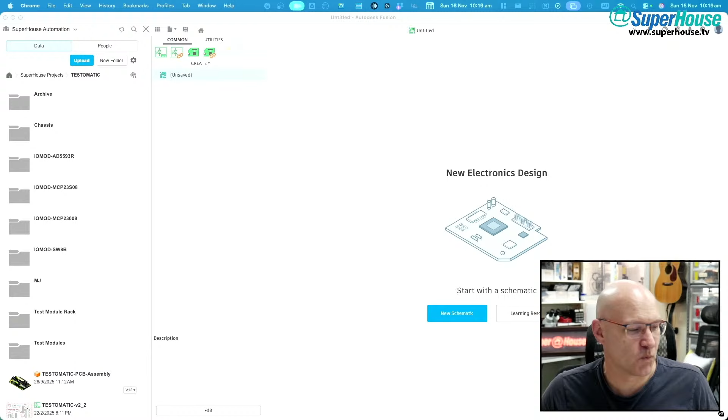Now, I have a problem. Okay, some of you will say, a problem? Just one? Only one? Okay, I have many problems.

This particular problem that I want to solve today is in relation to this - the Testomatic. How am I going to demonstrate this? All right, this is a test module.

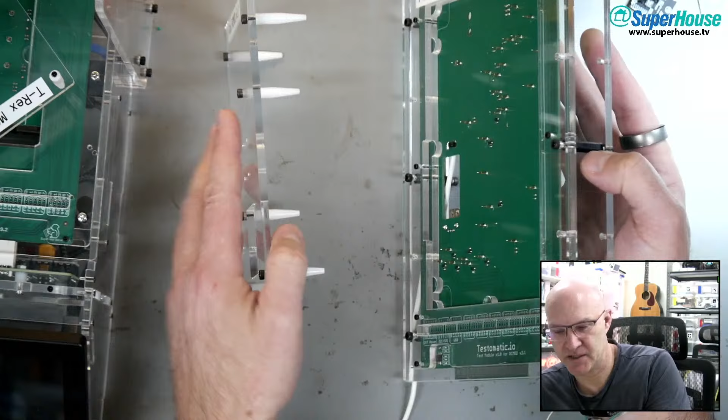This is the pressure plate. Now, this particular test module is the oversized one that goes into the Testomatic chassis. There is a pressure plate that pushes down on the top of the PCB so that it will engage with all of the little pogo pins in here. The PCB goes there, the pressure plate goes on top, and it's got these plastic pins that push down onto the top of the surface of the circuit board and engage it.

So if I rotate it this way, you are looking at the whole thing side on. It's lying on the side, but that's just because the camera is up in the sky looking straight down on me. So the pressure plate needs to be engaged like this - it pushes down on the PCB.

Now, what I need to do is - the actual test modules are quick change. It's got the edge connector on it, so I can slide these out, drop a new test module in and slide it in. That part is pretty well sorted and seems to work well. What I need is a way of attaching the pressure plate to the overhead gantry and the clamp, and being able to change them easily.

So I have an idea for how I'm going to do this, and it involves magnets. Like all good things, magnets are involved.

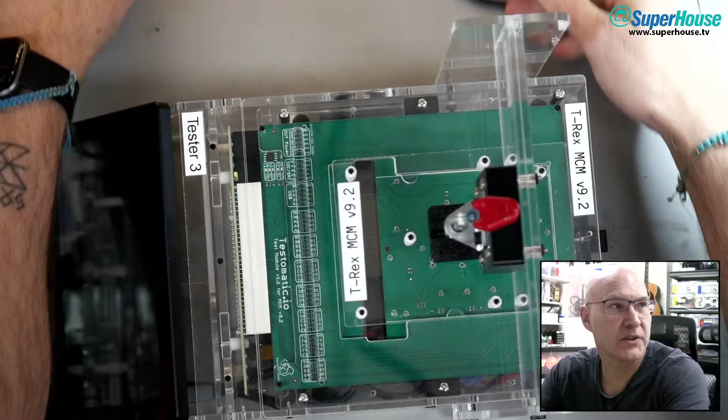This is, oops, got a cable getting in the way there. I'm going to try to tip this sideways without everything falling apart, which is going to be a bit of a challenge. All right, so this is the Testomatic chassis. There's the test module in it. There is the overhead gantry with the clamp that comes down, and that's what pushes down on the pressure plate to engage it with the PCB.

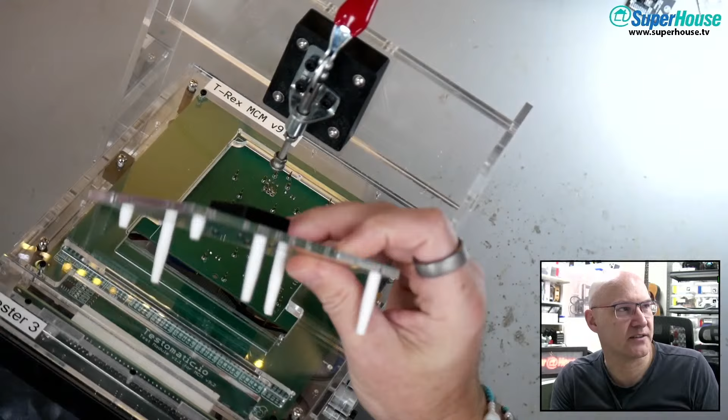So this pressure plate matches this test module. And you can see what I did was I 3D printed this little plastic block. I'll show you this in Fusion in a second, the actual design for it. It's kind of hard to see because it's all black - it'd be much easier to see if I'd printed it in a brighter color. It's got a slot in the end, like a T-shaped slot.

So what happens is this can slide onto the bolt head. If I slide that on there, that's now supported, and now it can be engaged and disengaged, and I can slide it off the bolt head. Now that is kind of okay.

This was like my first very quick attempt - this is going to be rubbish, but I just need something as a solution. So you're looking straight down on it now. It's got the T-shaped slot - you just slide it over the bolt head, and that's how it goes.

Now it does work, except that it's loose. So once it goes on, it can just fall off, and there's not a huge gap in there. If you look at the space between the pressure plate and the pogo pin area, it's like 10 or 12 millimeters gap. So you can slide a PCB in, but it's kind of awkward - the pins get in the way, the whole pressure plate gets in the way, it gets knocked off, it gets rotated.

Rotating this bolt adjusts the vertical position, so that changes how much pressure is applied. So I need to make sure that the bolt doesn't get rotated, and I also need to stop this from rotating. You can see that it just spins on the bolt head at the moment. I want it to be fixed so that it is aligned along here.

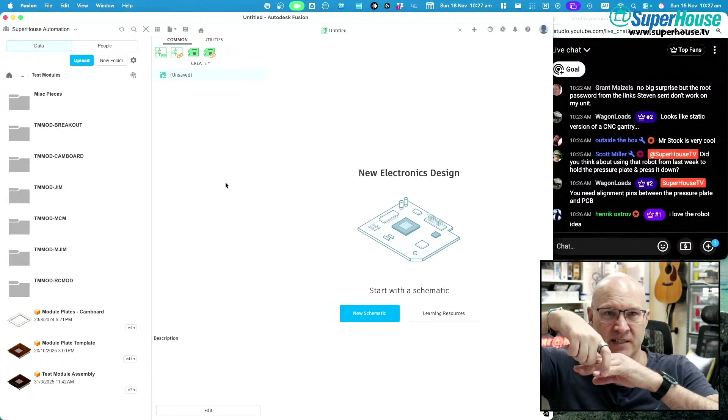Yeah, okay, now this is something for you all to think about. If I have a robot arm that I want to pick up a PCB, what should the actuator look like? It's actually a surprisingly difficult problem because the robot SO101s come with a claw gripper, which is fine if you want to pick up a soft ball like a tennis ball, the ideal size for that. But picking up a circuit board with parts on it is actually kind of hard because if it's sitting flat on the bench, the board itself is quite thin. So if you're going to grip the edges, you have to get the gripper oriented very accurately and it can slip off the edges of the PCB. But you can't grab the top of the board because there are parts on it, there might be capacitors sticking up and other random bits and pieces. So the idea of something like a vacuum pickup is also very tricky.

So, question for you: figure out a design. Ostrov said, can you make a longer piece for the clamp so it won't rotate with a pin? A longer piece for the clamp so it won't rotate with a pin. Yeah, maybe. Yeah, there could be multiple pins.

So the way this thing works, this is a mechanism off a test jig, and you can see it's got two vertical rails, vertical rods with little linear bearings in them. So the idea is that this plate moves vertically and it can't rotate, it can't twist that way, it can't twist that way. It's held by these two things here, and then the clamp just pushes it up and down. So that is a way of constraining the mechanism. But that's not changeable because you've got to disassemble this to get the plate off. So then what you'd need is a way of attaching the pressure plate to this with a quick release mechanism. So you're still stuck with the problem of how do you design that clamping mechanism.

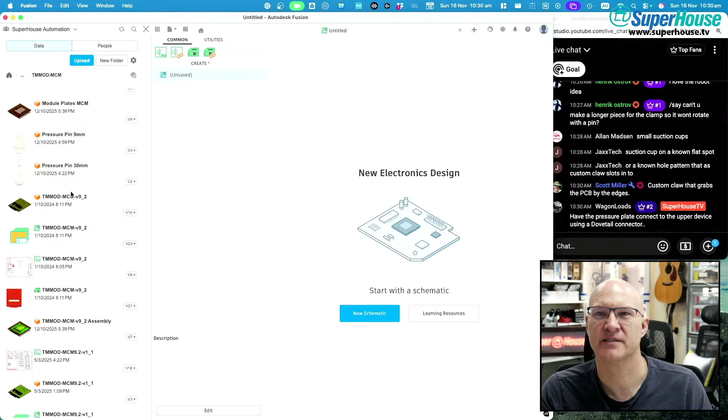Okay, where are we? TMMOD. Where did I even... Oh, miscellaneous pieces? Is this where it is? No. I'm trying to find... Oh, maybe I did it inside one of these. What I'm just looking for is... Oh, no, it might be in the template. No, not there. It's like Camboard, MCM, or maybe it's in MCM because that's what it's attached to. There's a clamp, the pressure plate, pressure pins of different sizes. No, I need to go through and do a bit of cleanup and reorganization of this. Not there.

Where is it? Oh, I don't even know what I called it. JaxxTech said, re your pressure plate, look at how sewing machine feet are attached. WagonLoads says, have a pressure plate connector connect to the upper device using a dovetail connector.

It won't be an RC mod, I'm pretty sure. No. Where is it? Oh, maybe under chassis? Could I have put it in here, even though it would not be the appropriate place for it? Yes, I did put it in here. Pressure plate clip.

This is the thing that I've got. Henrik said usually they use like flip up lids with interchangeable plates, for example, no rotation on there. Scott says industrial robots are always designed for replaceable end actuators, then the actuator is designed for the task.

Yes, exactly. So that's what I want, is a design for an actuator that could be attached to something like the SO101 robot. Now, in this design, you can see much more clearly the black thing that is attached to the top of the pressure plate. So this thing here that you can see, that black 3D printed plastic thing, that is this.

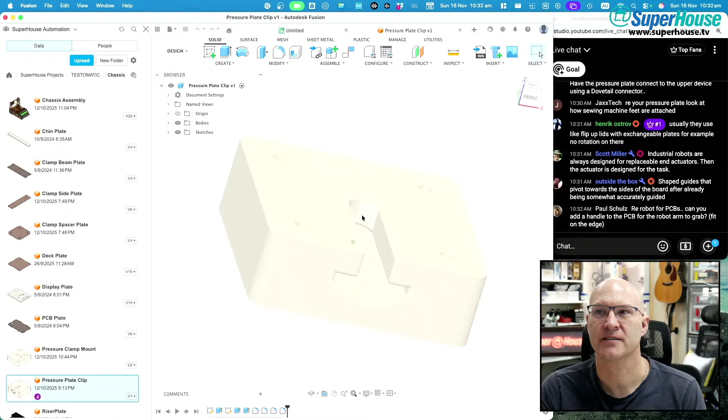So you can see that the head of the bolt slides into that T slot and then pushes down on this. And it's got these 4 screw holes, and the pressure plate is laser cut with holes in it. So there are self-tappers that go up through the pressure plate and into this block. Okay.

Now, there is another - this is going to sound totally ridiculous - there is another constraint. Actually, no, before I get into that, I'm going to... what am I going to do?

I'm going to create a new design, and where am I going to begin? Okay, I'm going to steal some geometry from this.

Edit sketch. I'm wondering if I should, yeah, stuff it. I'm just going to, or do I? My brain is kind of zigzagging, would be one way to put it. It's jigging and jagging because I'm thinking through all the different ways of actually starting.

Henrik says, can't you just use T-shaped head bolts? Just use T-head shaped bolts? Yeah, but how? In what way? You mean like just the way I'm already doing it?

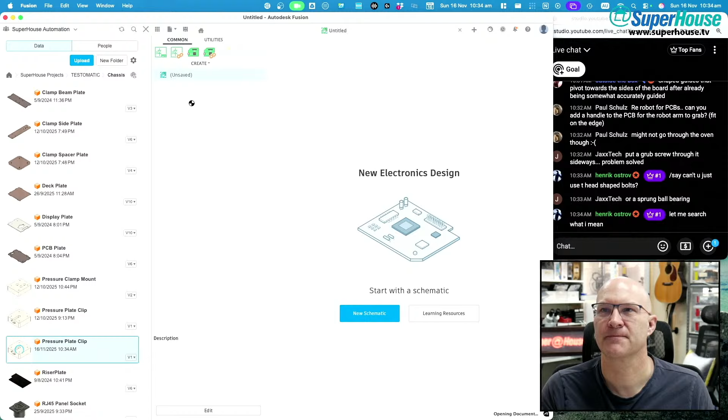Okay, so what I want to do, okay, I'm going to get rid of that. I'm going to close that pressure plate clip. I'm going to be really lazy, and I'm just going to copy this. And hang on, did that go into the, yes, it did go into the right place. Okay, I'm just going to make a copy of it. So I'm going to open this, close this, and I'm going to backtrack in time.

Pete time said, I see nobody has liked Jon's video, lol. It's because nobody likes my video. And get rid of that.

Okay, so what we are left with now is just a block, because I've just suppressed - in fact, can I multi-select? I'm just rolling back in time. I'm just going to delete all these features. Okay, so now we have a block. This block will fit the holes on the top of the pressure plate.

Now, okay, I'm going to get back to my silly restriction in a minute. Edit feature - so at the moment the block is 10 millimeters thick. I'm going to change that to 3 millimeters because what I'm going to do is put magnets in it.

Now, if I edit this sketch, I'm going to make some construction lines through here on the axes, because I'm going to... Henrik Ostrov said, I've sent you a link for the part I was thinking of. Yep, I saw a message, but I'm going to keep working on this.

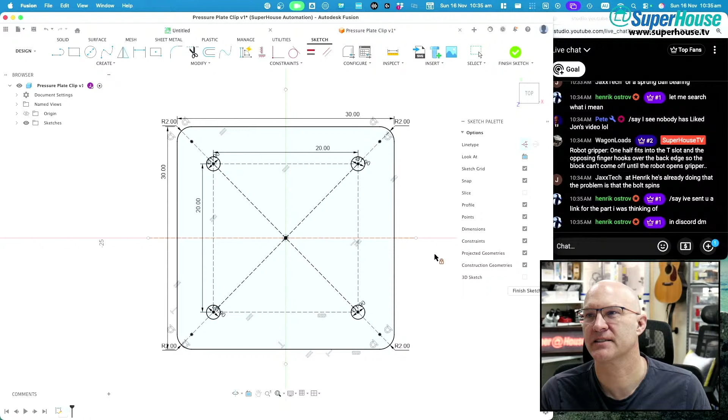Constraints, fix. I'm going to fix that and fix that. Then, what am I going to do? Modify parameters, and I'm going to... do I have any parameters? I do not.

Magnet diameter, and I'm going to make that 3 millimeters, and make some circles on, and I'm going to do magnet diameter, circle, magnet diameter, yes.

So this may be excessive, but I can always just not populate holes if that works out to be the way it goes, the way the cookie crumbles.

Alright, so I'm going to finish that and modify that and get rid of... Outside the box said, Immi and I can only hear you, as her tablet just failed and YT is functionally not a thing on a phone. Oh well.

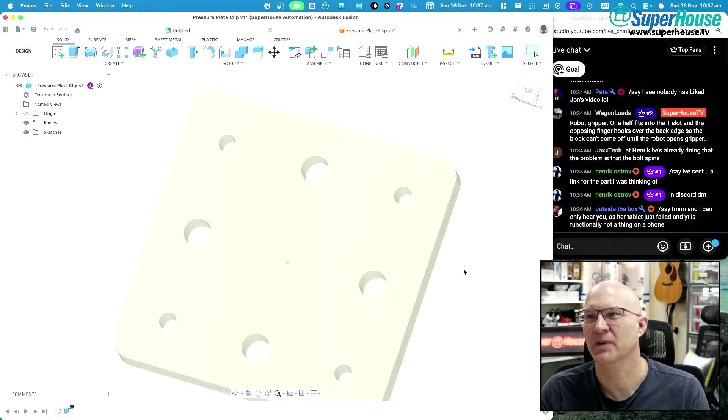You'll just have to use your imagination. Use the magic.

I'm just going to measure the diameter of the bolt head, which I could have got out of the other model, but anyway. It's just under 9 millimeters, so let's make a 10 millimeter hole in the center here.

Now I am visualizing here the end result of what I'm trying to get to.

Tabraze Malik just got back onto stream. Why not just change the bolt to one with a square head or 3D print it? I don't think that's going to solve the problem, because the bolt could still turn inside. Well, then how do you attach the bolt?

I want something where I can just snap these pressure plates on and off and have them go into the same orientation every time. So I want to do that, and then edit this and get rid of that. Anyway, yes, I have this visualization in my head of what it is that I'm doing here.

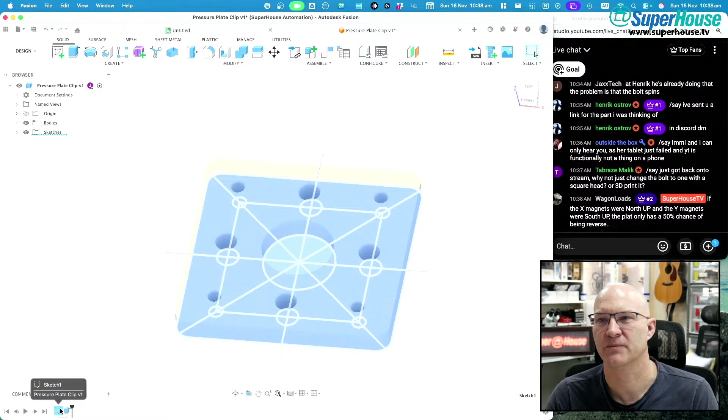Sorry, I got a message about... oops, I want to select all of these. No.

This could... do I want to angle this? I think I maybe do.

Okay, so that's 3 millimeters. I'm going to bring it in 1 millimeter. I'm just kind of talking to myself now.

All right, I want to chamfer this, but I want it to be... chamfer, 8 edges, equal distance. No, I want 2 distances. I want this one to be 1 millimeter, and I want the other one to be 3 millimeters because that's the thickness. Okay, so now we have a plate that

has the holes for it to be screwed onto. You're actually talking to all your imaginary friends. Yeah, you're right, Scott, I'm talking to my imaginary friends.

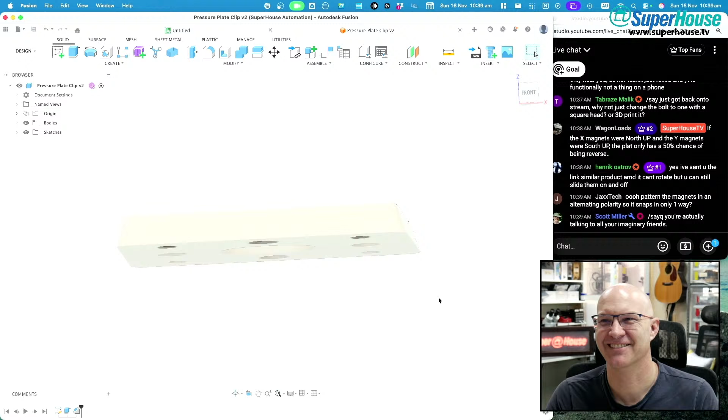So the plan with this is that this is to replace the black 3D printed thing that is currently on the top of that pressure plate. So what I've done is I've reduced its thickness to 3 millimeters because I'm going to use these little magnets, I've got these little things that are 3...

Oh, magnet thickness, I just screwed up. These magnets, they're little, you know, the little round disky type ones. I've got a bunch of them here. They are 3 millimeters thick, but they are not 3 millimeters diameter, they are 6 millimeters diameter.

So it is a good thing that I parameterized that. Let's make that 6 millimeters diameter. That would have been annoying. Okay, so now we've got holes for the magnets to go into. The whole plate is 3 millimeters thick, which means it's the same thickness as the magnet.

Said, I meant the bolts are meant for aluminium extrusions. Some of them can turn, but others actually don't. Ah, okay, they meant, yeah.

But the problem is, how do you attach it? I need a mechanism, the bolt is not the problem. I need a mechanism for attaching it to the pressure plate, because the pressure plate is just a piece of acrylic, it's a flat piece of plastic.

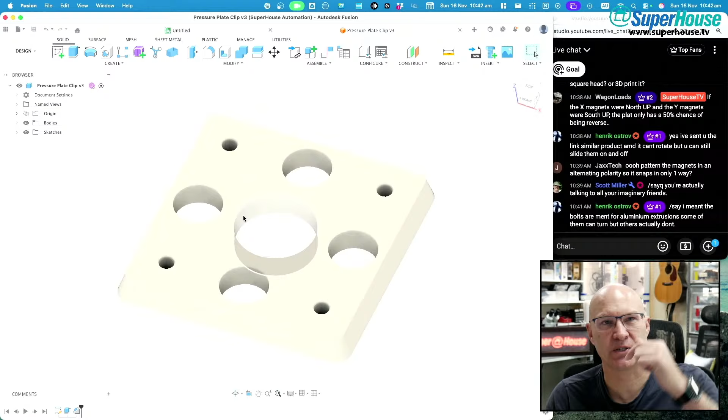Now, the reason that there is a big hole in the middle is that is possibly unnecessary, I don't even know yet. That's going to be for the end of the bolt head, potentially, which might protrude down from the clamping plate, the clamping portion that is going to intersect with this.

So here is what I'm going to do next. Now, what have I got? It is 30 millimeters across, 20 millimeter centers on those. And that's going to, oh no, that'll work, that'll work.

What I'm thinking of doing here is making the negative version of this piece that it will fit into.

Said, it can slide like the first solution you showed, just it won't rotate on the bolt head, something like that. Yeah, maybe. Okay, now I want to make...

I don't want to do that. I want to make a new design and sketch on there. Oops, wrong, no, I don't want to do that. I want to delete that sketch. No, finish sketch, delete, delete, delete.

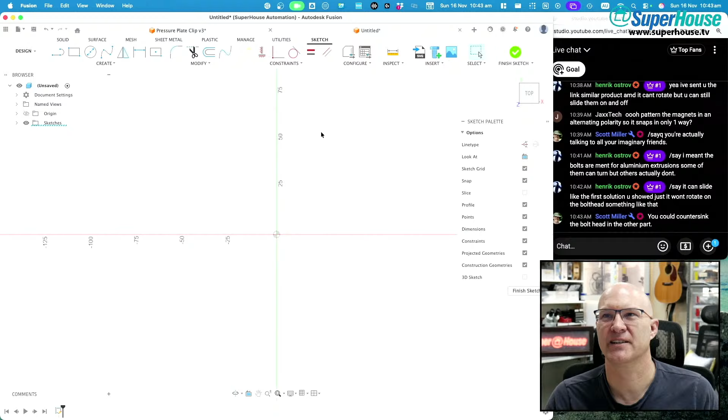I put the sketch on the wrong face. I want to put it on there. Okay, so we're looking down at it from the top. How am I going to do this?

So I want to go 30 millimeters, then angle it in, but I want 30 plus, okay, here we go. 30.

I have a cunning plan. This plan is so cunning, my lord. And then how much? 5 millimeters out, so I'll go 40 and 40.

And then, what did I have as the fillets on the inner corners? I think it was 2 millimeter fillets. So do a 2 on each of these. I don't know why the fillet tool deselects after setting - there's probably some little workflow thing in Fusion that I could improve.

Just because I like the idea of making the edges slightly rounded, I'm also going to put 2 millimeter fillets on the outside. And then we are going to turn this into an object. So I want to go up, then push that in. Yeah, okay, here we go.

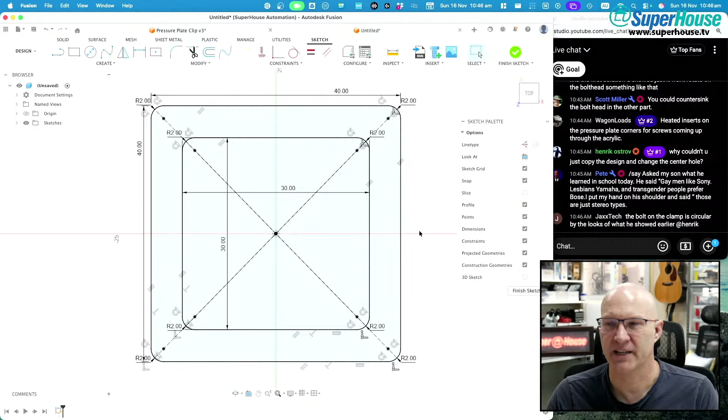Now coming back to here, what I probably should have done is once again duplicated this. In fact, it's not too late - I could just duplicate this, then the extrude can, yeah.

Yeah, it's not too late, I'm going to ditch this. Okay, I'm going to delete that and don't save - so I have now just undone all of my work. Back to here, duplicate this one.

And yes, copy it to here.

What about making the mounting block in two halves so they're keyed to each other, dovetails or alignment grooves, or upper half frames around the lower half? WagonLoads just described exactly what I'm doing - what's in my head, which has not yet come out in reality. So you are going to see all of those things.

JaxxTech said, why not use a hex head and have flat sides that hold the plate in alignment, or does the bolt itself spin? Oh, the bolt itself spins unless there's a locking nut against the other end of it, which is used to set the vertical position, so there is a complication. I can't use a hex containment of the bolt head because I need to be able to rotate the bolt to adjust the vertical position. So we will get to that.

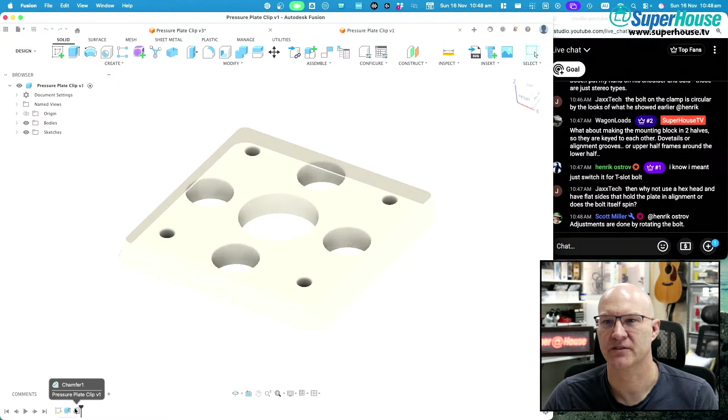Okay, this - alright, I'm going to suppress that. Stuff it, I'm just going to delete it. Yes, delete it, and delete the other thing. Okay, so now, edit sketch.

So what I'm going to do now on this one is change this diameter to 4.2 because I want to put an M4 bolt through there. And I'm going to get rid of these corner holes, and add another rectangle out here and take it out to, what was that, 30? So that's right, I was doing 40 and 40, wasn't I?

And then I'm going to fillet those corners - that one and that one. And now I will have something that I can use to make effectively a negative of the other part, like almost a dovetail sort of thing. Okay, so now finish - do I want to finish? Yes, okay, show me the sketch.

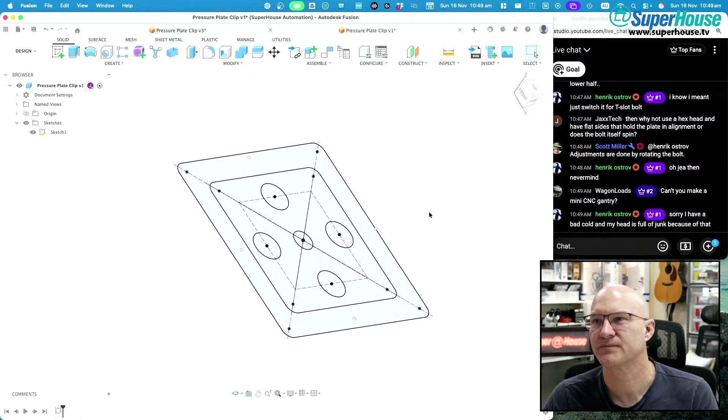Okay, so now I'm going to extrude everything, and then undo. Scott Miller said countersink the bolt head - yes, that is my plan.

So then I'm going to press pull, how much? Let's make it - no, I've got to envelop the 3, then the 3, which is 6, plus 4, yeah, 10. 10 millimeters should do it. Okay, and then bring the sketch back. And now, this is when the magic happens. I'm going to include all of these there.

Repeat press pull, and I'm going to go 3 as a cut. Then turn that sketch back off.

Grab all of these edges.

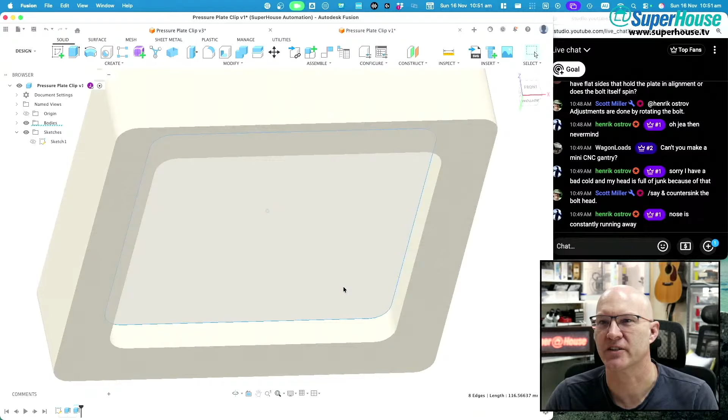Also I should mention I may be taking myself to hospital after this stream to get a tetanus injection. What's going on out there? There's someone outside doing something, and I don't know what.

Okay, chamfer, 2 distance. I want that one to be 3 millimeters in that dimension, and I want that one to be 1 millimeter in that dimension. Okay, which matches, yeah.

If your eyes are going strange right now, and it looks like some optical illusion thing, it's possibly because I have the camera set in orthographic mode. If I switch to perspective mode, it'll start to look more like the actual physical object, but it's not so useful when you're doing the stuff. Okay, so now I'm going to turn that sketch back on.

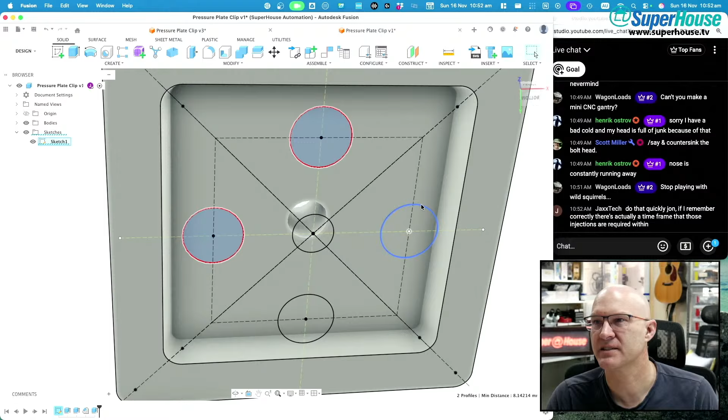I'm going to press pull to that face, and then I'm going to grab these and press pull 6 millimeters, because that is the 3 millimeter gap plus the hole. And now we have a block that has holes for magnets.

It has a hole for the bolt head to go into, and it will fit down on top of this. So this part will be on the pressure plate, and this part will come down descending on top of it, or the other one will come up underneath it rather, and the magnets will all snap together. So the bolt will come through here, the bolt head will be on this side, and the head will fit into this clearance hole. That's my plan anyway.

But what I think I'll do is rebate the... Tabraze Malik said, 'Why, what happened? Did you step on a rusty nail?' Oh yeah, that's right, I did. I did exactly that.

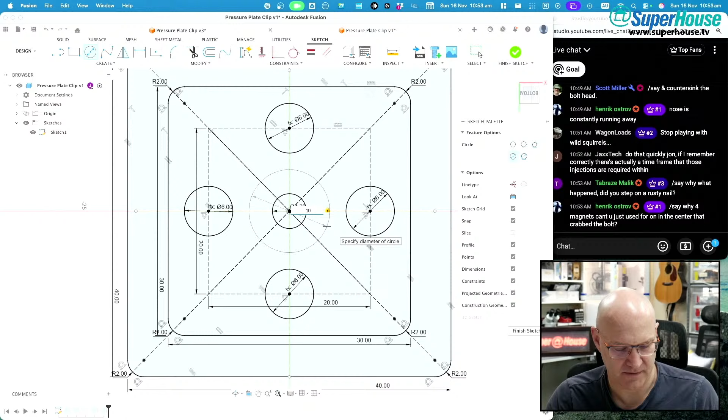Let's make this Henrik Ostrov 10. He said, 'Why 4 magnets, can't you just use one in the center that grabs the bolt?' Because I want to stop it rotating. Well, I could just use one in the center to grab the bolt. Yeah, I don't know, that is an interesting idea to brace. That would possibly optimize the design a little.

So I'm going to press this to 6, which will give it 3 millimeters of rebate. Okay, so I'm going to save that and maybe do a little bit of...

Do I? Don't I? Yeah. Just a tiny little smidge of filleting here, just because I think it helps. No, I'm going to make that bigger. Let's make that 0.4, okay, so it can be printed this way.

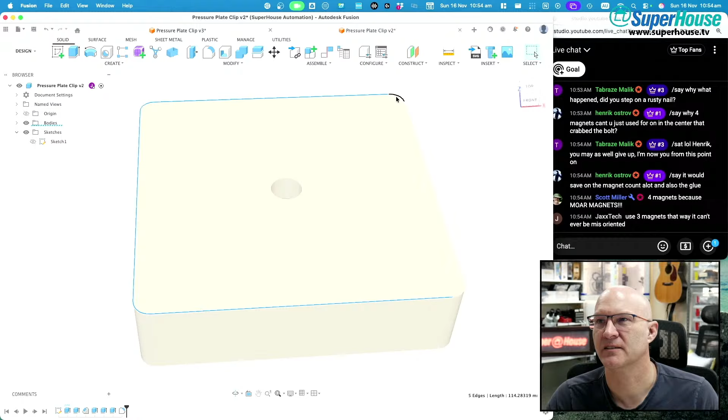Now, do I want to do anything on those edges? Yeah, I think I might just slightly bevel these edges. Henrik Ostrov said, 'It would save on the magnet count a lot, and also the glue.' Yeah, that's true, it would. I'm just not sure that it would be strong enough.

Now, where am I? Yeah, the magnets may be overkill. I don't know, this is all going to be an experiment. This is going to be the first thing.

What am I doing? Chamfering, that's right. I'm chamfering by 0.5. No, I want the chamfer bigger. Let's go to 1 - that still doesn't look like very much. Let's go for 2. Oh, I see, it's a... it was a double. Yeah, that'll do. Okay, 2mm chamfer on there.

Can you test right now how strongly the magnet sticks on the bolt? Yes, yes, I could.

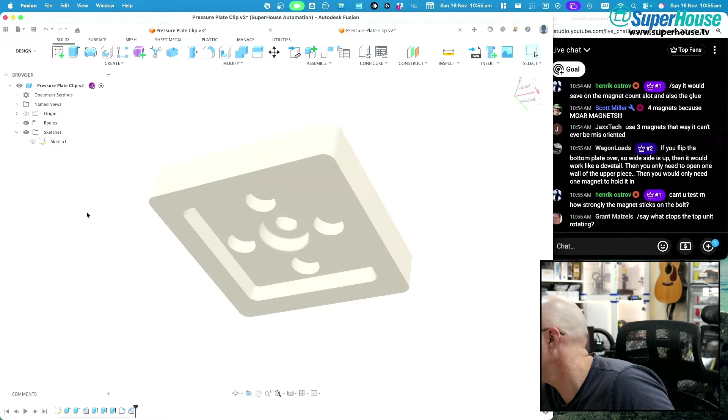Grab a magnet, grab out the bolt. Just got to unscrew it from the thingamajigamy. Oh, this bolt is a lot longer than I thought. Oh, it doesn't stick at all. Hang on, yeah, so this is the bolt out of it. This is a magnet - it sticks to the nut that is on the bolt, but it won't stick to the bolt because the bolt is stainless steel. I hadn't thought of that.

Yeah. If it wasn't an off-white object on a white background.

Yeah, okay, so alright, so next stage is I am going to go appearance, and let's pick something that will make it easier. Oh, come on. Plastic. Polyimide? Yeah, let's do that.

Okay, so we'll make this one gold, and this one - what do we do for this? Let's make it a translucent thing, and we'll make it translucent. Oh, what about maybe transparent? Yeah, transparent acrylic red, okay, let's do that. And that way, when we... oh, maybe the other way around. Oh no, this will do.

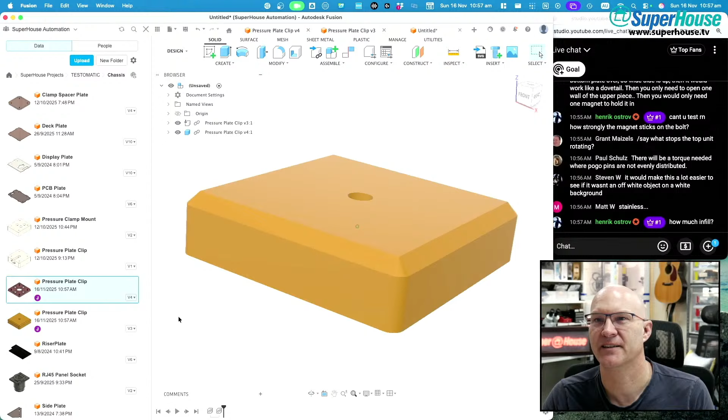Yep, that, and then save that, and then I'm going to go new design, bring this in, insert into current design, and boom, and then this one, insert into current design. Yeah, I should change it so that the translucent one is on the outside. Let's do that. We'll go appearance on this one, make this one that, and then save it.

And this one we will make... where was it? Polyimide, Kapton. Let's make it that.

And save that. Now we'll update the components in this one, and we will get the translucent red outer shell, which will be attached to the bolt. So that's going to be on the... let's see if I turn it, yeah, so this part here will be attached to the bolt. The bolt will go up through there with the head recessed inside and attached to the clamp, and then this part will be attached to the actual thingamajigamy.

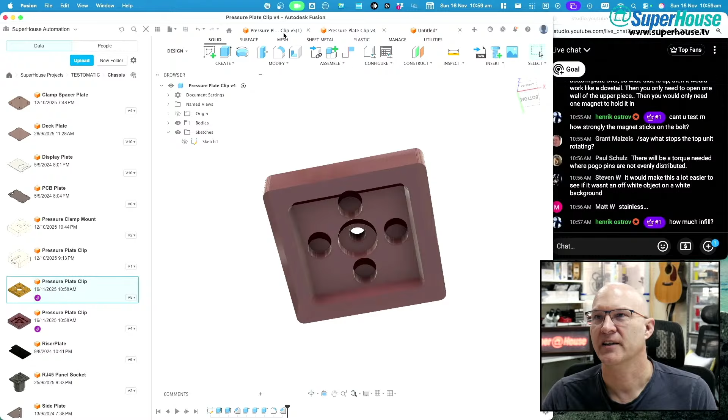Now, one of the reasons I have been puzzling over this whole design in my head for so long is that I have a very specific constraint that I want this part, which attaches to the pressure plate, to be as thin as possible. And if I'm going to use a magnet, the 3mm magnet is the...

Scott Miller said, now model the bolt from scratch, threads included. That's actually remarkably easy in Fusion.

I have done it before many times for different types of things.

No, I'm not. I was going to start designing a bolt with a hex head, but I need to get these other things off to the printer.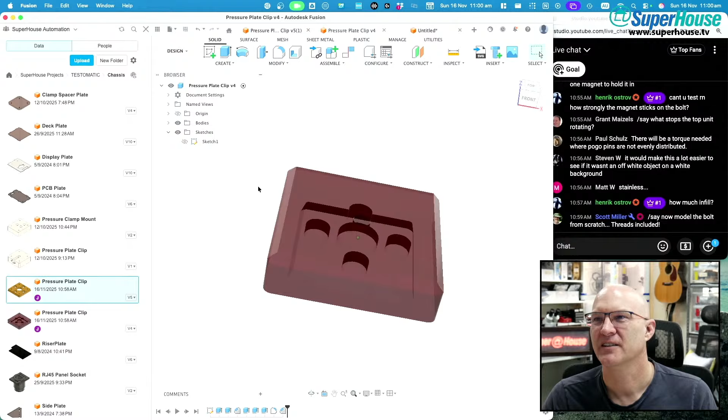So let's do this. Let's send these to the printer, and then I can go on with other things. So what am I going to do?

I want to save as mesh. That's right, I'm trying to remember what I'm doing. Okay, pressure plate test. No, I don't want to save it there. I want to save it, just moving off screen, just in case, since I'm not sure what's going to pop up.

Dropbox, 3D printing, where are we? Testomatic. Here we go. And pressure plate clip. Yes, replace.

Oh, I should give these more sensible names. This is silly. All right, pressure plate clip... pressure plate clip lower, that'll do for now. Rename: pressure plate clip lower. Pressure plate clip upper.

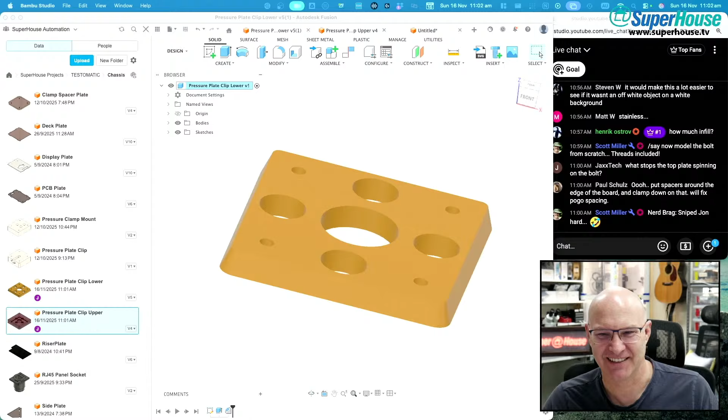Okay. Where are we? Device, wake up device, sync. Okay, sync info, grab the filaments because I'm not sure if they are up to date. Looks like it is.

Okay, let's grab, where are we? Testomatic, pressure plate clip lower, and move that aside somewhere. And then we're going to grab upper, and what I want to do is flip it.

Ostrov said, how much infill are you going to use? Oh, not much, they don't need to be super strong. So what filament should we use is the question.

I think I'm going to do them in blue because that's the blue PLA that's loaded at the moment. I could do them in two different colors, but then there'd be lots of filament changes, there'd be 3 millimeters worth of filament changes.

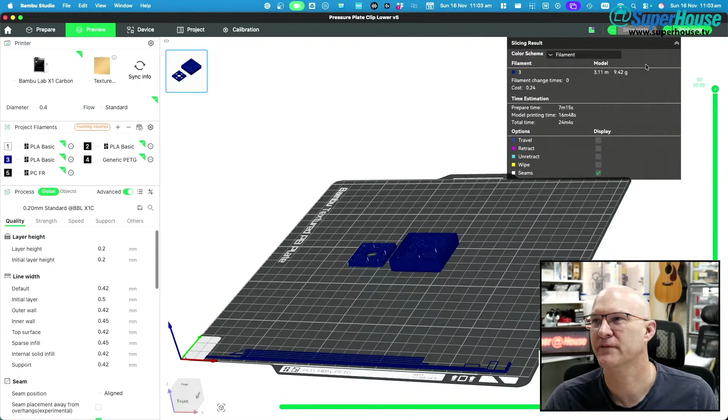What have I got? Okay, standard 0.2, don't need support. Yeah, slice, go. What's it saying? 24 minutes total time with 7 minutes prep time. So do it, printer, go.

Start giving me my things. Now, I have an embarrassing reason for needing the part on the pressure plate to be 3 millimeters thick, and that is that I need...

Yesterday I designed a rack to hold these things on, and I started... I'm just going to move that out of the way for now so we can look at other things. Now, where are we? Testomatic, test module rack. Okay, what I did was, these modules are awkward.

Like this thing here, I designed it so that it has a nice bottom on it. You can put this down on a bench, and even though it's got all the pogo pins and things underneath, see it's got these spaces, these are 20 millimeter spaces, and then there's the bottom plate, and I put rubber feet on it. So I can just put these down on a bench, and they're actually really quite convenient like that.

Then the pressure plate, if it's just like this, you can stack them on top of each other. But stacking is not particularly convenient if you end up with a stack of these on your bench. And also, I need to store the pressure plates with them ideally, so that's stored as a unit, and that's not convenient because how do you stack those?

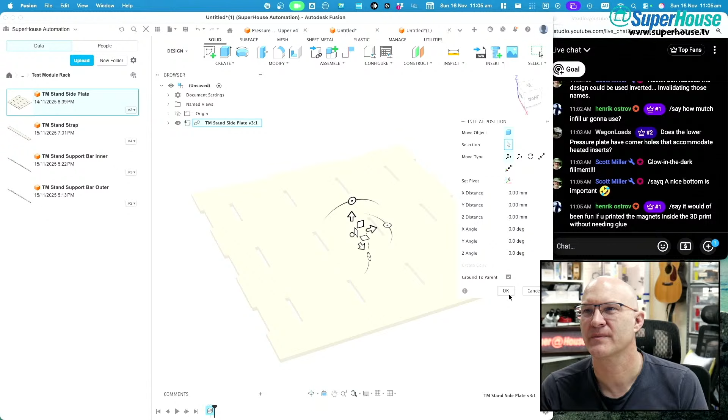Ostrov said it would have been fun if you printed the magnets inside the 3D print without needing glue. Oh yeah, get it to pause the print at that point and then insert them. Yeah, that's true.

All right, I'm just going to stand that up. So what I need to do is change the support bar outer, insert into current design. Now, which way is that? Oh, I need to rotate that. No, I need to rotate it that way because of the bolt holes. And there, take it up to there.

I need to do this out of a different material so that... is that right? Yeah, that's right. Okay, so that we can see the difference. So that goes there. Then a stand strap, insert into current design, and I'll rotate it that way.

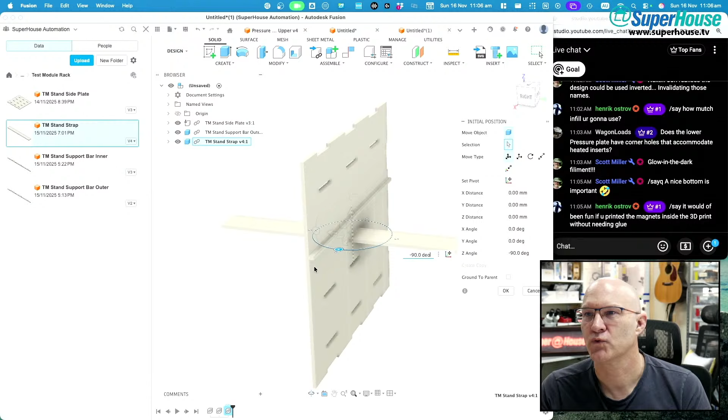Bring it down to there. Is that right? Or I may need to bring it like a 0.5 millimeter increment or something at this point. But I can do it with a joint as well. Okay, let's joint this. Let's joint this.

So you can see that there is a flat plastic thing here which has got little rebates. The reason for the rebates is to force alignment of the center point, which is not going to make a whole lot of sense to you right now. But I'm just going to joint this.

Oh, hang on. No, I've got to... stand strap. Move, move. Rotate that 90 degrees. I just want to get it sort of approximately into the ballpark of the position. And then I can joint it on... I want to joint that onto that.

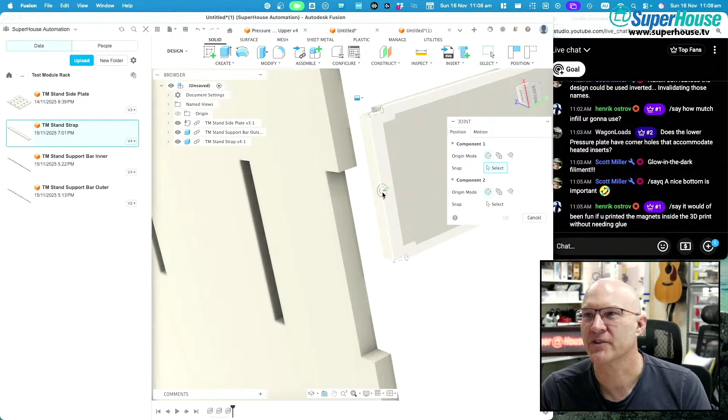Oh no, I got the wrong thing. I want to joint it onto... I picked the wrong face. I want to joint that onto that. That's what I should have done the first time. Okay.

And then I will do insert into current design and rotate that 180, move it this way. And how am I going to do this alignment? I won't do it with a joint. I'm just going to set it to 190, 185. I think it's got to be 187.5.

187.5? No. 180. It might be 181.2, 188.25. Or is it 0.5? Yeah, that'll do. Anyway, this is just a representation. All I'm trying to do here is give you an idea of what it is that I've done.

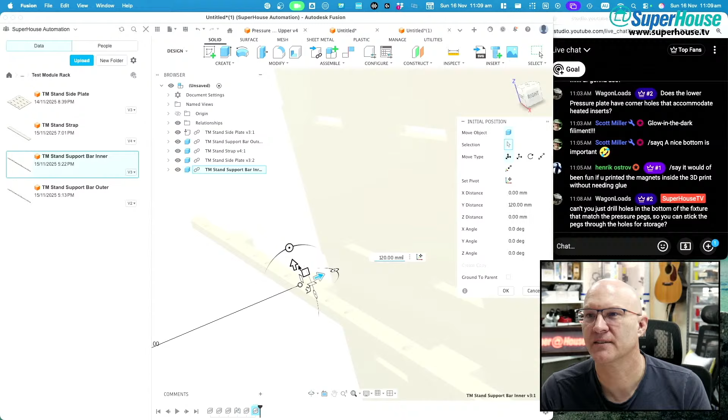And then there is an inner, insert into current design, and yeah, take that up, take that across. Oop, it's a little bit high. And bring it down to align it there. Is it aligned? Approximately. And now I'm going to leave it at that position, not fully engaged with the slots.

Because what I did was I've got these vertical plates. All right, backing up. The whole reason for this is if I'm going to see if I can pull up Reolink so I can show you a camera view of the clean room.

Login succeeded. Yeah, so show me some cameras. Show me some cameras. Oh, okay. Hang on, I will be back in a second. I've got to enable some stuff. Things have been moving around in here.

Because I want to give you a view inside the cleanish room so that you can see the reason that I came up with this semi-arbitrary 3mm constraint.

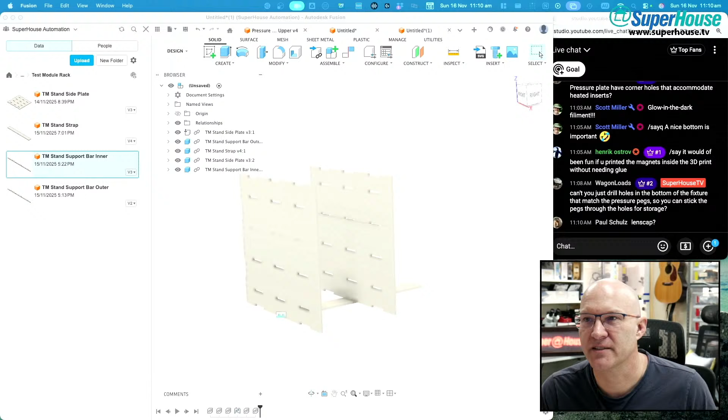All right, while that is happening, I am going to open this and change this to... I want this one to be, yeah, let's do it, that'll do. Translucent acrylic, red, doesn't matter what color. Because the point of this is just to be able to see what's going on here.

So what I did was design the... yeah, I don't have any cameras. No camera, no camera, no camera. My cameras aren't working. My cameras aren't working. Come back, cameras.

Reolink. Aha, camera, camera. Yes, now it's working. All right, so this is the current live view from inside the cleanish room.

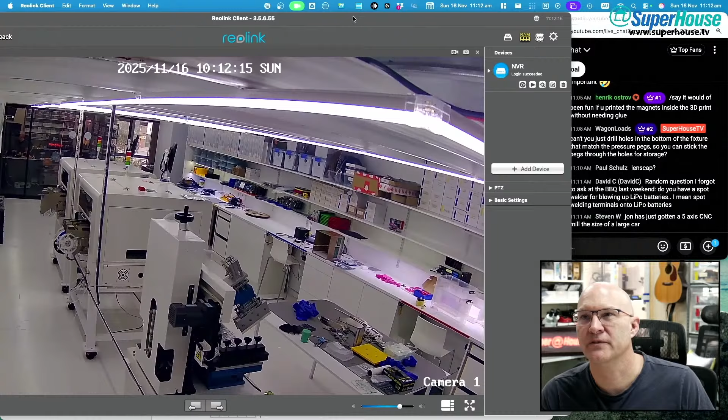The area just here, almost central of the screen. Let me move this and zoom in even more. Oh, that's as zoomed as I can get.

You can see the cardboard box, which is my little light box. Just to the left of that is the testing bench, and you can see the trays. There are green trays and red trays, which are the trays PCBs go into after testing to show whether they passed or failed. I want to store the test modules up on this shelf. So there's the bench, the first shelf, right there where my cursor is squiggling, and those are PCBs on trays ready to be tested.

I want this first shelf to be all of the PCBs that are in the queue, and the shelf above it is where I will store the test modules. There is a vertical constraint there.

So the height of that shelf - oh, you see that little yellow thing? You might just be able to make it out right there. That's an air quality sensor, one of the ones that was on the live stream. It's just sitting in the clean room, powered up on the shelf so I can monitor it.

Ostrov said, couldn't you use the common known PCB racks? They won't fit on a shelf, but they are good. Are you talking about for storing the test modules or for storing PCBs? Because I've got my own custom things, yeah, anyway, that's a whole other story.

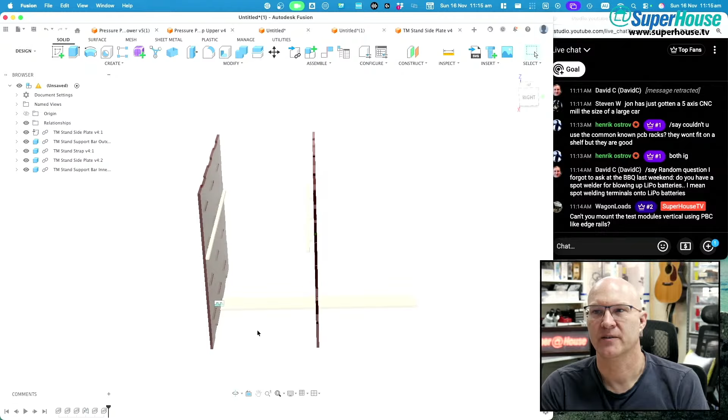Then there are these verticals, which are sheets with slots in them. And then I've cut these little support pieces - a thin piece of acrylic with little tabs that insert into it, making like little hanger edges. And those edges match the edges of the test modules.

So this is a rack that these test modules can slide into and be supported, and it will support 4 test modules vertically within that space, with another plate on the end there. So there are a total of 8 - this one rack will hold 8 test modules.

Now, most of the test modules are 200 millimeters deep - this is like the standard size. But some, like this one, are deeper. So I needed to be able to have variable backstops so that the modules go into the rack and then stop, so that the fronts are all at the same position so that you can grab them and pull them out again.

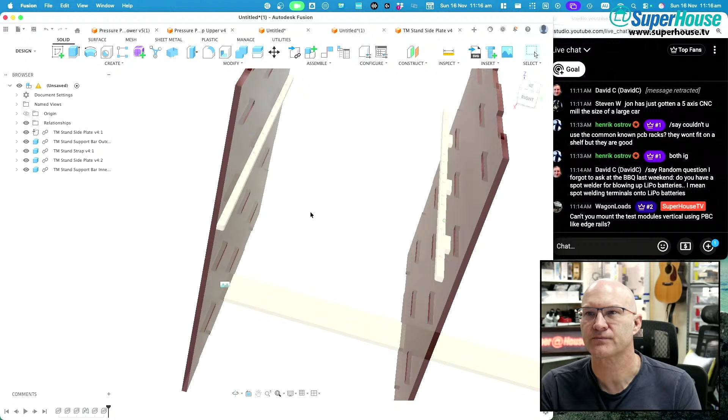So what I did was put holes into them so that a little M3 bolt can go through, and these are at 20 millimeter increments, acting as a stopper. So what I can do is put a stopper in at the correct depth for the module that will go into that slot in the rack, so that when you put them in, they all go to the same position.

Now the rails that go on the outside edges have tabs that are 40 millimeters long, and they go all the way along. Now what I did with the inner ones - this is why I haven't fully engaged it - is that these tabs are 20 millimeters long, and the idea is that you have one engaged from one side of the plate, the other engaged from the other side. They're flipped 180 degrees, so they're identical but flipped, and the two 20 millimeter things slide alongside each other.

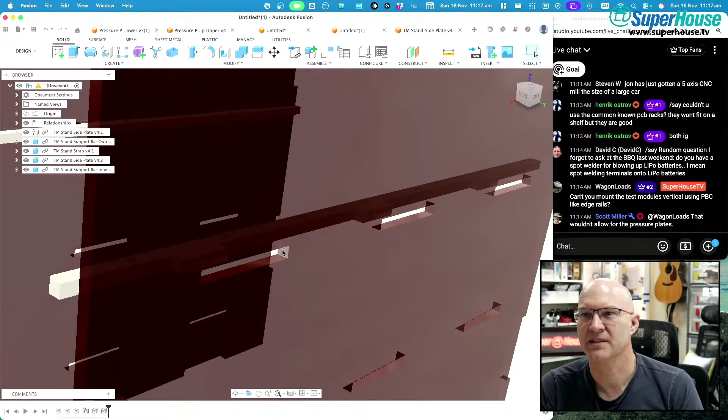So on this side, for example, the little thing goes in the front half of the slot. From the other side, the one that slides in and glues in from this side will go into the back half of the slot, and then the two overlap each other.

Wagon Loads asked, can't you mount the test modules vertically using PCB edge rails? That was actually my original thought. My plan had been to make slots like a vertical hard disk bay, and have it slide in. But Scott is exactly right, the problem is as soon as you add these, it becomes really awkward figuring out how to make this all work.

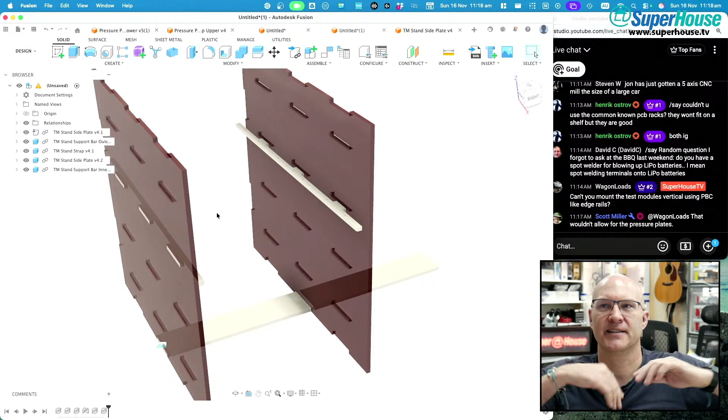Anyway, that's what I was building yesterday when I punctured my foot. I was out the back running the laser cutter, and cutting acrylic absolutely stinks. So I had the back door open and the exhaust fan running, trying to get airflow through. I'd put stuff on the laser cutter, let it go, and walk outside. I was wandering around, talking to Mitch on the phone, chatting while waiting for the laser cutter to do its thing. And I stepped on a piece of wood with a rusty nail sticking up out of it, and it went right through the footwear into the bottom of my foot.

I've been in two minds about whether to do anything about it. My last tetanus booster must have been over 20 years ago, and I've been thinking it was just a little puncture, a little nail in the bottom of my foot — how bad could it be? But the thing is, if you actually get tetanus, it's really, really bad. And I'm on immunosuppressant medication, so if I did get a bacterial tetanus infection, it could be very bad because my body probably couldn't fight it.

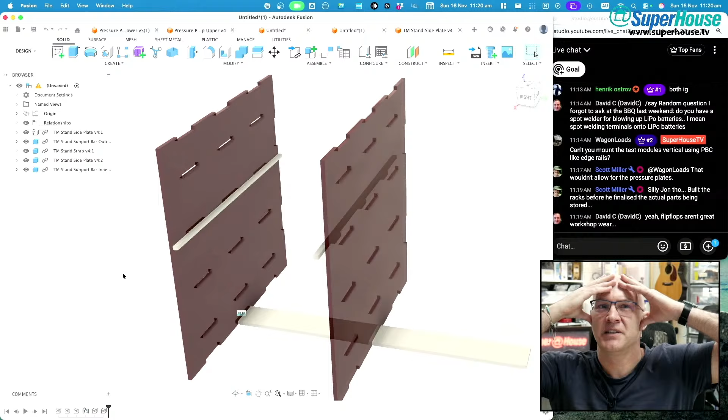This happened maybe 5 o'clock last night. Since then I've been thinking, I'm fine, I'm not going to get sick, it's not going to be a problem. Why would I go to the hospital and spend hours sitting in the waiting room, wasting my entire afternoon for no benefit? But the downside is, if I did actually get a tetanus infection, and right now it's percolating in my foot and starting to spread into my body, the outcome could be really bad. So, yeah, it just feels kind of silly going to hospital for something like that.

I'd probably, if it was a weekday, see if I could make an appointment with my GP. Ostrov said I should do a community cleanup instead of the next barbecue — take your friends and clean up around the workshop. That seems like it would be taking advantage.

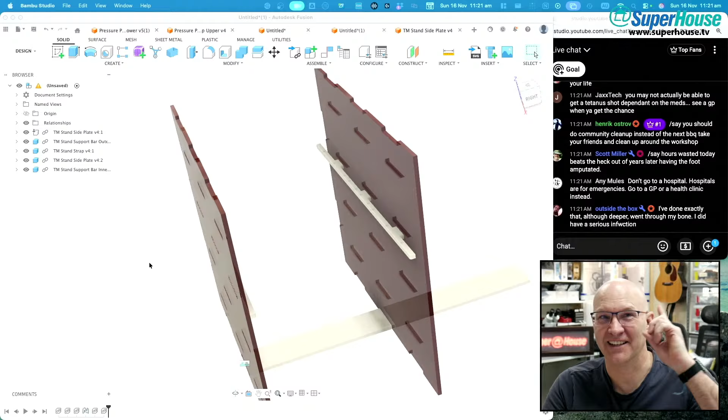Scott Miller said hours wasted today beats the heck out of years later having the foot amputated. Yeah, that's true. Though on the plus side, it would make it really hard to get ankle locks and things on me in jiu-jitsu, like a heel hook. There's the trick — you can't get heel hooked if you don't have a heel. I'll just fight you with my stumps.

Okay, so anyway, just imagine this with multiple straps across the bottom and top, and all these little ridges filled in, making little slots that the modules can go into. That's what I was building last night.

Let's see, what folder am I in? I just want to make sure this is stored in the right place. I'll save this as TM stand assembly — not really a good reason for keeping that name, but anyway. Testomatic, I want... no, it wasn't in chassis, was it? I've lost it, where did I put it? No, I think it was in chassis, I had these parts there. Yes, okay, so this is going to be the pressure plate clip assembly.

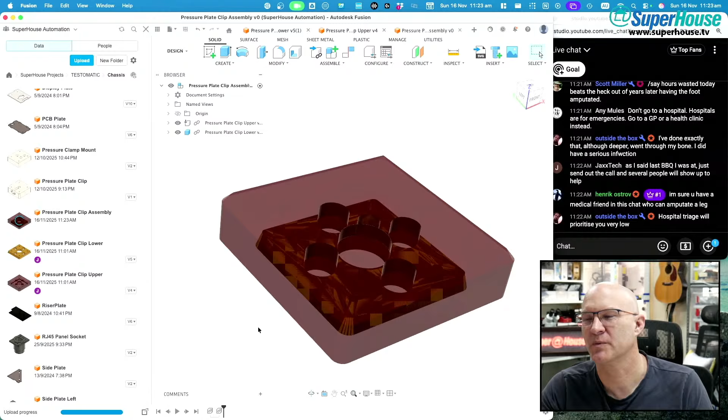Crispian says hospital triage will prioritize you very low. Yes, I'll end up sitting there for the whole afternoon.

So I should make sure my laptop is charged, which it probably isn't, and my phone is charged, which it might be, so I can sit there and at least not be totally wasting my time. All right, so printing is underway — it's already finished printing the small part of the pressure plate, above the 3mm mark, and now it's printing this part. So, how long have we got?

7 minutes. Okay, so it's going to be finishing at 11:31.

JaxxTech said go to urgent care instead. Yeah, that's the same thing essentially. Urgent care, isn't that an American term? Or is it a British term? I don't know, is it different to the emergency room, the ER?

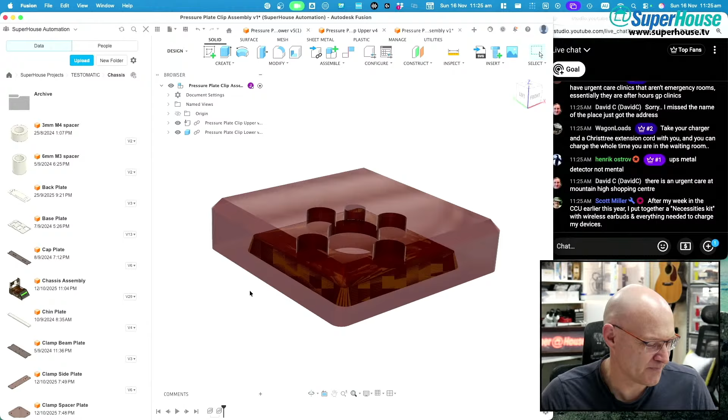Okay, so now what was I going to do? I don't remember, I was going to show you something else. Okay, I think I am going to go and grab the...

Scott says, after my week in the CCU earlier this year, I put together a necessities kit with wireless earbuds and everything needed to charge my devices. Oh yeah, that's a good idea. Dad knows where to find it to send along in the ambulance next time. Next time? There isn't going to be a next time, Scott. It'll be fine, no next time.

I'm going to grab the bits that are gluing together. Oh, I've got weights on it to hold it, to keep it all flat while the super glue dries, which it still hasn't. I need to breathe on it or something. Yeah, that's not fully bedded down. I need some glue and clamp. So yeah, I don't like the way super glue goes frosty on acrylic.

But this is one side, and you can see that's the vertical piece with the little rails that the modules will sit on. So the modules will sit on them like that and slide in for storage. And the height - okay, so this is where that 3mm constraint comes in. A module, where is it? Okay, this one. So a module with its pressure plate sitting - I've got to try to do this with one hand - sitting in such a way that the pressure pins go into the slot, so that's as low as it can possibly be, sitting on there, and that has to clear the bottom.

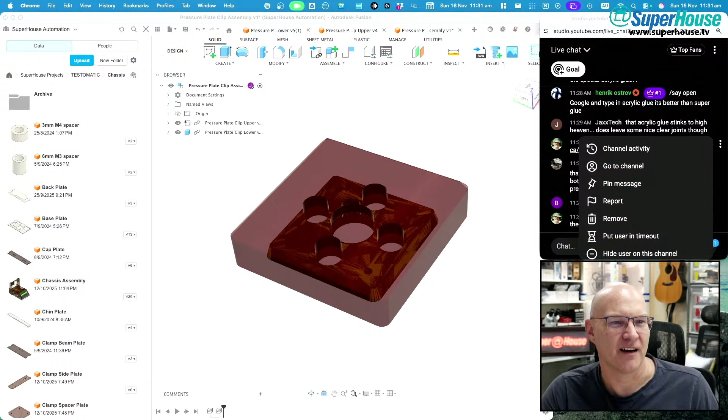JB Weld, Super Weld Instant Adhesive. This one. Acrylic Special Glue Transparent for Organic Glass Adhesive, PC board, ABS, plastic. Oh, they're doing some keyword stuffing there. Acrylic glue, yes. Okay, I did not know that specialist acrylic glue was a thing. I should have known.

But come on, get that out of the way. Yes, okay.

Ooh, the printer's finished, I just got a notification on my phone. My phone just went doing. All right, I'm going to go and grab these pieces.

I will go and grab the pieces, and we shall see how badly I screwed this up. Oh look, you can see pieces there. These are pieces for the robot arm. I've been printing more sets of the plastics for the...

Also, some acrylic glue dries on instant contact, so once you drop it, it seeps into the cracks, and then it's dry. Ooh nice, that sounds good, Henrik. All right.

Here we go. Crickety crackety, come on, off you get. I'm going to switch to overhead view. Okay, so this is the plate that was just printed. It's got a little... oops, what is that? Don't know. Oh, it's because I was cutting a sticker. All right, so I just need to clean up a little bit of scrunginess in there.

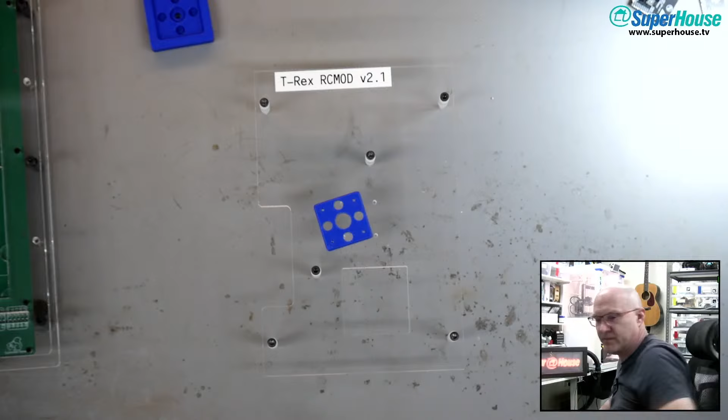All right, so that will go onto there, and this is what I mean. The screws will go through the pressure plate, come up, and then go onto that. Then the other part, let's get this out of the way. Move the Testomatic chassis. And then the other part, this one here, is what will descend and engage with this. So that and that need to mate, and they do, amazingly. So that onto there, and then snap on there. So bolt through, do it up tight.

Okay, come on. Now, did I get the hole size right? Because I don't know, I'm probably going to have to tweak things like the hole size for the magnet. It feels like it might be a little bit on the tight side. So this is where you really just got to print it and see.

Nope, doesn't quite want to go into the hole. I need to increase the hole size slightly, or munge it. Although munging it is not going to be so easy on this piece where the holes are rebated. They're blind holes. Ostrov said, can you hammer it in? I wouldn't want to hammer a magnet. I could apply pressure to it, but if you hammer them, they can either shatter or demagnetize. So I'm going to avoid hammering the magnets.

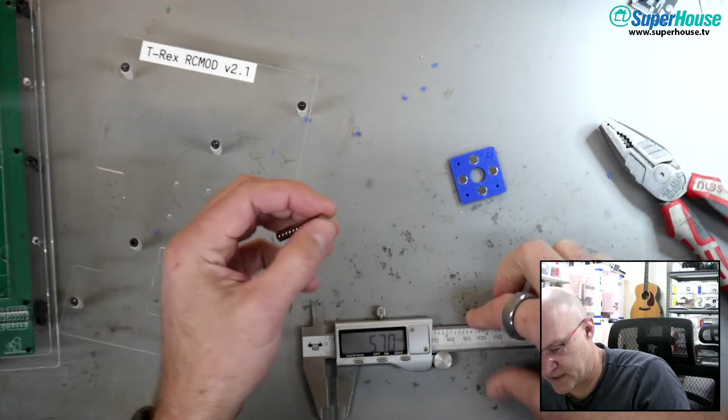But I think this solution should overall work out okay. Yeah, I need to print a new version of this with slightly bigger holes. I don't know how much bigger to go. It's come out as 5.7 when the magnets are a bit over 6. So the magnets are slightly over 6, the holes are slightly under 6.

This is a discrepancy that must be rectified.

Alright, so before doing that, oh no, maybe I'm just thinking about the order, given that there is 20 minutes, and I think I will go to the hospital today, or somewhere. I will find an urgent care place. I'll look up what the options are around here.

Excuse me. So I don't want to run overtime. I want to get onto that so that I'm not spending the rest of the day sitting around waiting in a hospital queue.

Okay, I'm going to increase that hole size. What'll I take it to? I think I'll take it to 6.2, and bring that down.

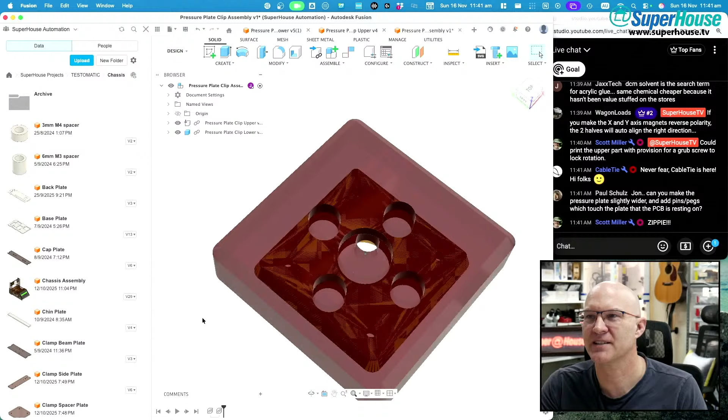Cable tie. Oh, Scott says, could print the upper part with provision for a grub screw to lock rotation. Maybe? I think I see what you're saying. So like a grub screw coming through from the side, pushing against the bolt. That is an interesting idea. Got to think about that one.

Paul said, can you make the pressure plate slightly wider and add pins and pegs which touch the plate that the PCB is resting on? Maybe, but the question is, what is the purpose, and what is it that you're wanting to achieve by doing that? This will fix the separation and align the pressure plate. Maybe. That's an interesting way of thinking about it. Align it, yeah, maybe.

Okay, where are we? Pressure plate upper. I'm going to modify the parameter on that, make that 6.2, and then I'm going to print this one again.

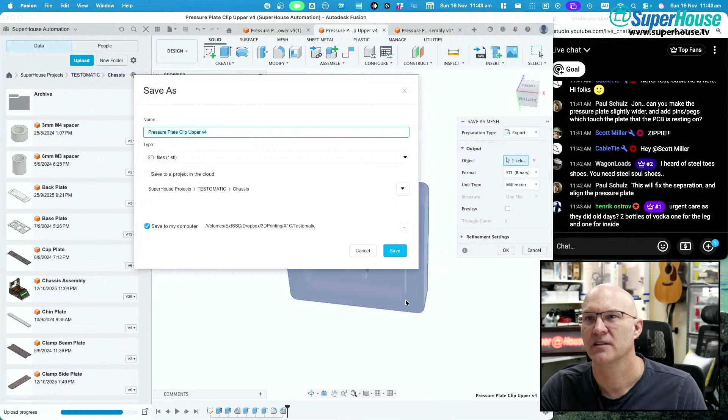Save as mesh, yes, yes, yes. Pressure plate. Oh yeah, it's because it hadn't finished saving yet. Where is Bambu Studio? It's right here. Prepare. Okay, get rid of those.

Add pressure plate upper V4. I'm not convinced that the file is updated. Let's see. Where is, hang on, got to get back to Fusion.

Yeah, V5. Okay, I'm going to export as mesh again now that it's saved, so it's got the V5 file name, and then I will actually know whether I am picking the right file. V5, there we go. Pressure plate upper V5. And place it on that face, and go. Oh, hang on, no.

I want to do it in... I'll do it in the blue again. Okay, slice and print. So it's got 19 minutes to print.

And send. Okay, hang on. It had flow dynamics and all that stuff turned on. Ah, well, doesn't matter. Or does it? Yeah, screw it. I'm going to cancel that job and do it without all the flow dynamics calibration. It'll save a minute or two.

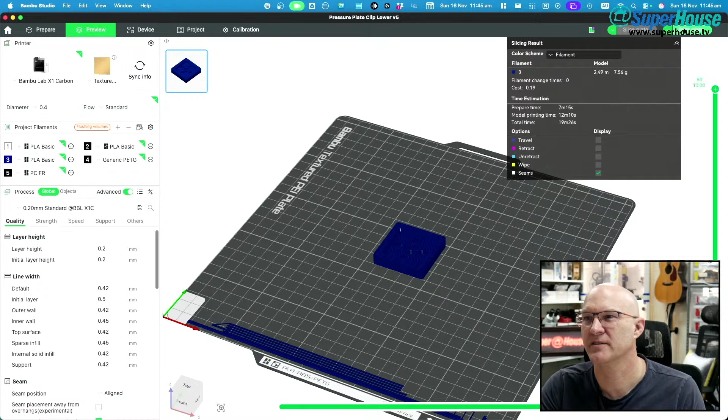Do you want to stop? Yes, I do. Okay, now I'm going to go back to prepare, preview, and print. Flow dynamics off, bed leveling off, because I know that it's okay anyway.

Did it save any time? I don't know. It still says print time is 19 minutes, but maybe that's not including flow dynamics calibration. It would have done that calibration and the bed leveling on the last print that we just did, so we don't need to do it again.

Scott Miller said it will finish 4 minutes into bodging time. Yeah, that's right. Now what is it saying? Yeah, so 12:04 is its estimated completion time.

Jacksec said, isn't the bed in your lap still? What? Oh, it is. Thank you. That is a very good point. It would have, in fact, if I don't get this in time, it'll detect that the bed isn't there.

So I have just thrown the bed back on the machine. It would have done its scan and discovered that the bed was not on the machine. So yeah, one nice thing about Bambu printers is they do try to catch errors. Like they figure out if there is something wrong, whether the bed is there or not, and then complain. Or if you've got the wrong bed on it, like you've sliced it and said you're using a textured build plate and you've got the smooth build plate on there, it'll say wrong build plate installed.

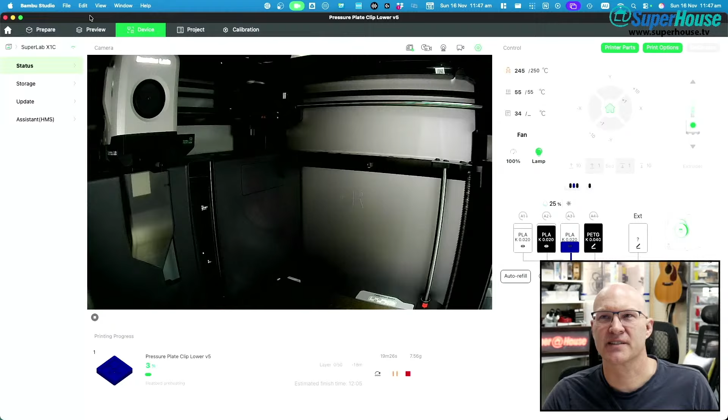So yeah, it uses its camera to look at the QR codes on the build plates to do the setup. Now what are we going to do? Oh, okay. Just because I'm going to do something silly, just because.

Circumscribed or inscribed. I want to do a circumscribed one, and it's going to be 3.5. Yes. Finish.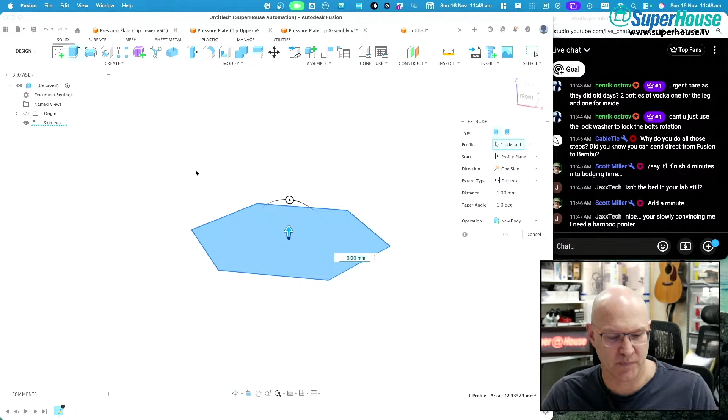Woo. And press pull 3. Yes. And what else? What are we going to do? Let's do that and make it 4. Yeah, that'll do.

And then 20. Yeah. And then, let's go—well, actually what I'll do is, should I chamfer the end? Yeah, what the hell, I'm going to chamfer that by 1. No, I'll make it 0.6. And then create.

Where are we? Thread on there. 4mm metric and modeled. Yes, there we go. Here's a bolt. And then I could make it look a little bit more...

Scott Miller said, wah ha ha ha ha ha ha.

Then I could make it look a little bit more realistic by, I could stick a logo or something on it, but I can't be bothered doing that right now. I want to chain select the edges, that would be nicer. There, and did I get them all? I think I got them all.

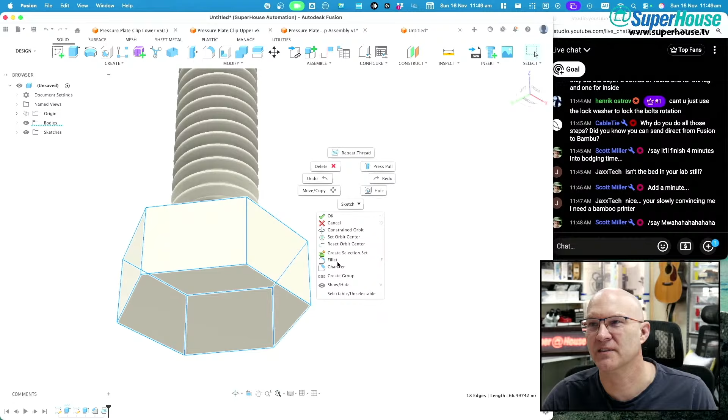Yeah, let's just give it a slightly softened look and do appearance. Stainless. Come on, why is it not finding stainless steel? Close plastic, close. Come on. Metal. Stainless. Come on, stainless, that'll do. Satin will do. Apply it to there. There.

Henrik Ostrov said, yeah, we have a bolt now, model a wrench for it as well. We could make it a working wrench, like with a proper... In fact, now that I've done this, because I've actually done this, which is kind of a silly thing to do...

Let's call this M4 bolt hex. No, it's a... what is that head style? I don't remember. Anyway, 20 millimeter. Now what we can do is go into the pressure plate assembly.

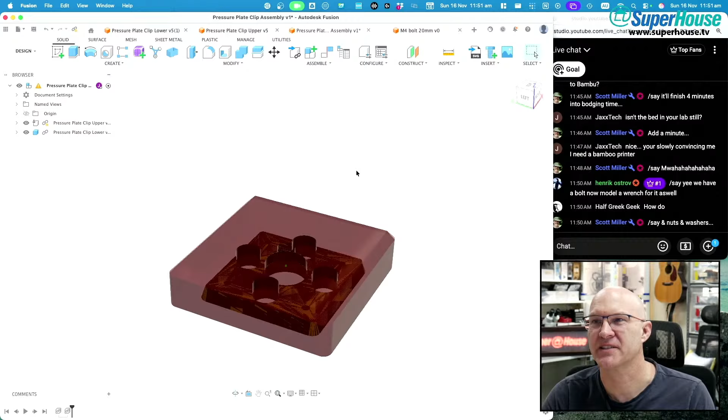Scott Miller said, nuts, washers. Yeah, nuts and washers. But this is just getting silly. It's like modeling things for the sake of doing it. So there's no real point to it.

Insert into current design. There we go. Except that I need to move it up slightly. Let's move it up by 3. How thick did I make the head? Did I make it 4 millimeters thick? I can't remember.

Let's go to inspect, section analysis, and we'll stick it on that face. Yep, that'll do. And then turn these back on so we can get a cross section.

And this one, I'm going to move. I could use a joint or something, but nah. Okay, move it to there. Henrik Ostrov said, TPU washer that wouldn't let it rotate when tightened up.

Henrik. Interesting idea. Okay.

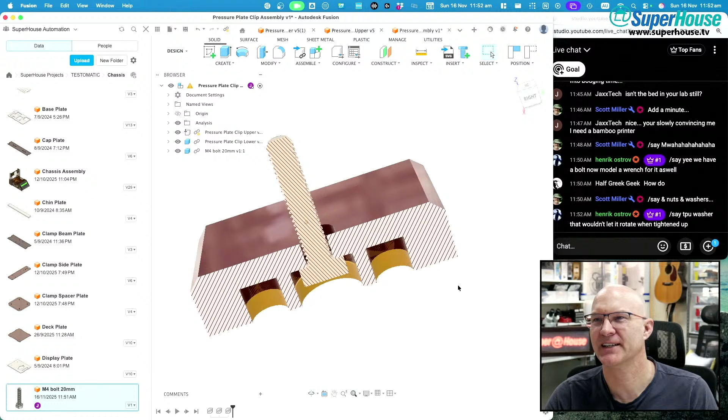Yes, so that is an interesting idea. Let's hide that analysis. Okay.

Yeah, I could model the magnets, but that would be just kind of silly. Little cylinders. Or, as CableTie says, cut a hex shape into the block instead of a round hole.

No, there is a problem with that, CableTie. You would have missed the earlier discussion. The problem I have is that I can't make the head of this bolt captive because the vertical position is changed by turning that bolt. That's the Z-axis adjustment. So I need to be able to turn it to tune the position and then lock it in place. Having it captive would prevent me from doing that. I need to be able to adjust it and then bring a lock nut or something down on top of this to hold it at that position, Henrik.

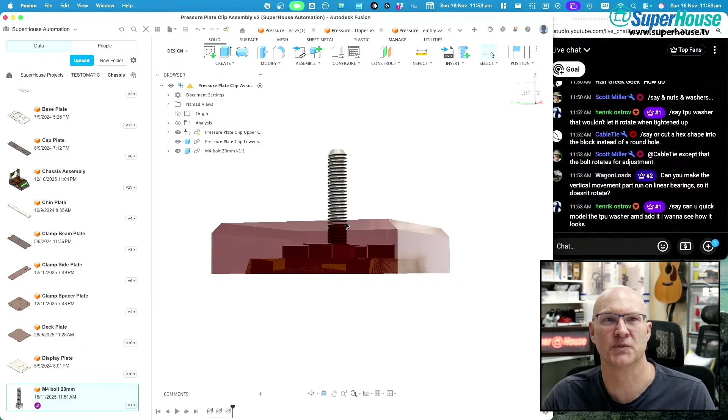Ostrov said, can you quick model the TPU washer? I want to see how it looks. Model a TPU washer. Yeah, okay. Just for you, Henrik, this is going to be the silliest thing ever.

Let's make this 4.2 millimeters. And how big should we make the head of the washer? Make it 7 millimeters? Scott Miller said, extrude a collar with provision for a grub screw on the upper part.

With a, yeah, that was, someone else mentioned that earlier. Who was that? Press pull. How thick is a washer? Let's make it, Henrik Ostrov said, 0.6 of a millimeter. Also use wing nuts, it's easier to tighten.

Get rid of stainless. Is there like a rubber material? Get rid of metal, come on. Scott Miller said, that was me.

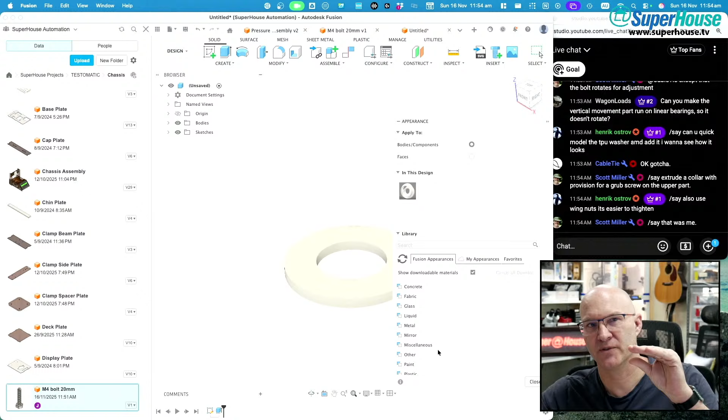Oh Scott, yeah, so Scott suggested a grub screw through the side. Yeah, so it could be done. When Scott suggested that, my idea was a grub screw through the side of the big rectangular block, but having a collar above it with a smaller grub screw might end up being more practical.

Yeah, that is an interesting idea. It would mean I couldn't print it that way up, I'd have to print it the other way and then use supports. But that's all right.

What am I doing? What am I doing? Other, is base materials, is there like a... No, I don't want base materials. Is there like a rubber... Would it come under plastic? I don't think it would. Nylon, oh maybe it would have TPU in here.

Translucent, polycarbonate, no. What about TPU? Search. Rubber? I don't know why it's not finding anything. From a Fusion Appearance Library. Ah okay, rubber soft. Yeah, let's apply this one. Okay.

Close. And M4 rubber washer. And then we can insert it into here.

But first I'm going to move this one. I should have just used the hotkeys. I'm going to move it by minus 0.6, because that was the thickness that I made the washer.

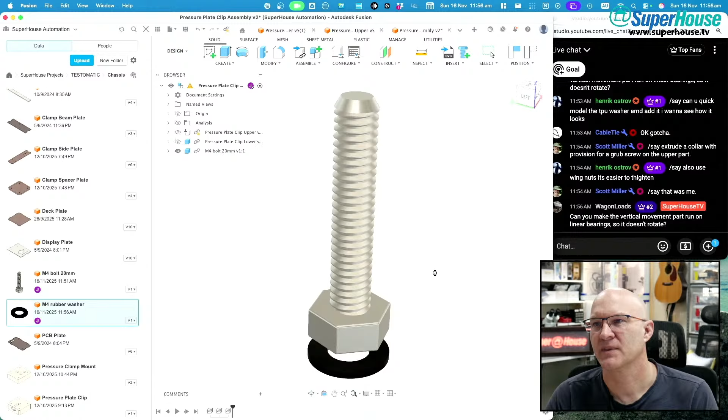I'm going to hide that and that. Insert this. And move that up to there. And then I can do a joint, so I'm going to go joint of that face onto that face.

Is that going to work? No, it's not. Okay, I can't joint that to there. How about, no, I'm just going to move it. Rubber washer, move, I'll do it the crude way. Minus 1.5, it needs to be minus 1.6.

Scott Miller said, there we go, imagine a 5-axis CNC the same size as the 3D printer, could make it out of brass. Yeah well, what you're talking about is a project that my friend Steve has sort of already done prototypes of, like, yeah anyway, I won't get into all of that.

So now I'll turn these back on, and let's turn the analysis back on so we can see the cross section. So there is the rubber washer in between the M4 bolt head and the plastic up the top.

So Henrik, happy now? Whoops, what did I do? I think I just, yes, that's better. I was trying to save.

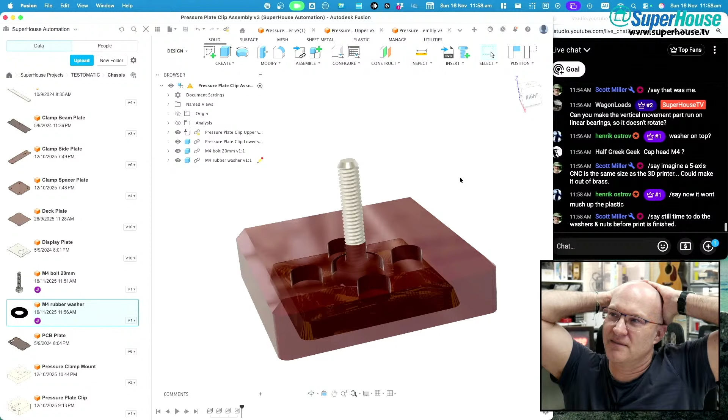Yeah, desktop CNC. Yes, Steve has actually already built desktop CNCs, and there is a whole Linux CNC thing. There has been the tool changer thing I've talked about on streams in the past. Yeah, CNC stuff is something that I haven't really talked about much on streams, but it is. Henrik Ostrov said, now it won't mush up the plastic. But it, yeah, true. But it is now, it is definitely an area of interest of mine, and I have my baby CNC out there, which I collected a control card for. Scott Miller said, still time to do the washer's nuts before the print is finished.

Yeah, I could. Well, I've already done the washer, the rubber washer at least.

Where is the print up to? Oh, it's 5 minutes away.

Said, can you use a wingnut on top? Yeah, I could. I think you mentioned that earlier, or someone did. Yes, a wingnut could go on top, so that would be a good idea.

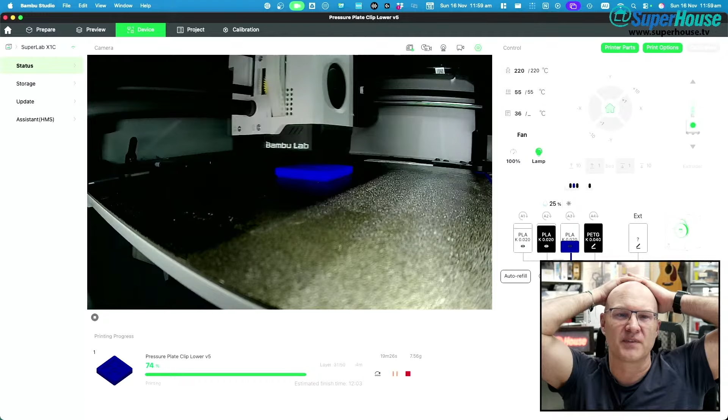What was I saying? That's right. So Steve has already mostly retrofitted Linux CNC control onto his big Mazak CNC lathe.

Scott Miller said, silly TTS doesn't understand ampersand. It should understand ampersand.

So I am installing the same system that he's got on his big Mazak CNC lathe on my baby CNC, which is why I was there last weekend getting the parts for that. So yeah, anyway, all of that is happening in the background, Scott Miller said.

Scott Miller said what? Ampersand? Yes, it doesn't understand ampersand. That is interesting, it treats it as a silent character. But it is actually interesting that it said Scott Miller said, and then silence. So it recognizes that there is a message, and it recognizes that it's not an empty message, but it didn't say anything. Design a peanut butter jar to keep it in.

Design a peanut butter jar. But I want to eat the peanut butter. I want to eat the peanut butter. Okay.

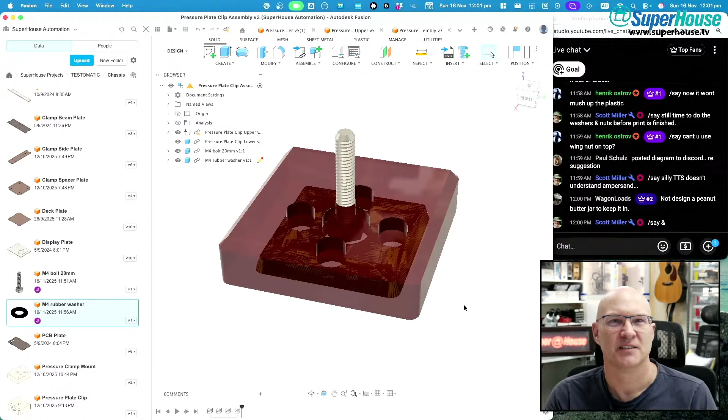Now, where am I at? I don't know, that's right. What I should do, I know what I should do. While I am waiting for the other thing to print, I need to switch over to here.

So we were about to have a replacement for this come off the printer, but I need to screw this onto here. And to do that, I'm going to need M2 self-tappers that are 4.5 plus 3 millimeters long, but no longer. So ideally I need like 7 millimeter, but I don't think I'm going to get that. I think I'm going to need to use 6 millimeter M2s, which is unfortunate because I can't use 8 millimeter, they would protrude all the way through.

M2, 3 to 8. I'll bring in both the regular and the self-tappers because I'm not really sure what's going to bite better. And I may need to adjust the holes, maybe reduce their size or something to allow the self-tappers to grip. So I've got my little containers of self-tappers. Put that one aside for now, and I will start with, I'll try with 6 millimeter non-countersunk self-tappers, and we'll see how well that attaches it.

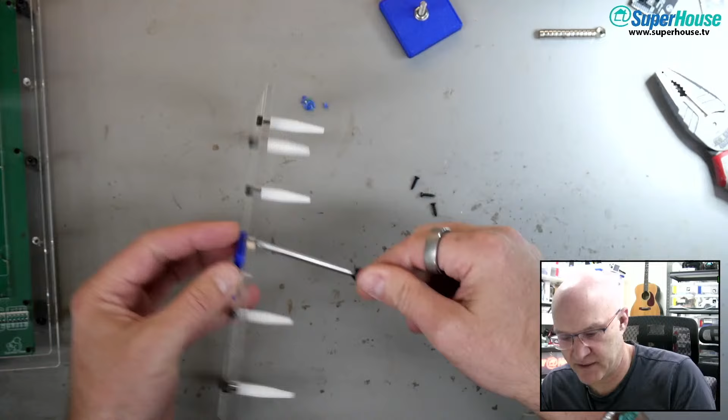What I could do is also use a washer as a bit of a spacer so that, Henrik Ostrov said, it doesn't protrude through too much. The other thing is that I could add clearance for it in here, and then if the end comes through, it won't be too much of a disaster. So I'll just try without washers to start with, and I'll see. It just barely pokes the end through.

Yeah, it's medical time. It's medical time? Yeah, it will be in just a moment. But first, I want to grab that other thing off the printer.

I probably don't need 4 screws on this, but overkill is always just the right level of kill.

Is that bedded down? It looks like it is. Okay, so, kind of cool.

Clink, clink. As I didn't even mention this while I was doing it, but you remember that while I was doing the design, I beveled the edges. It is a 3:1 ratio, 3 millimeters thick, so it comes down 3 millimeters and in 1 millimeter. That is so that this will have a kind of self-centering effect. It'll go over the top and then self-align itself onto this. Overkill is best kill.

Henrik Ostrov said, overkill is definitely best kill. And the printer has just finished, so we can now see if the magnet size is correct.

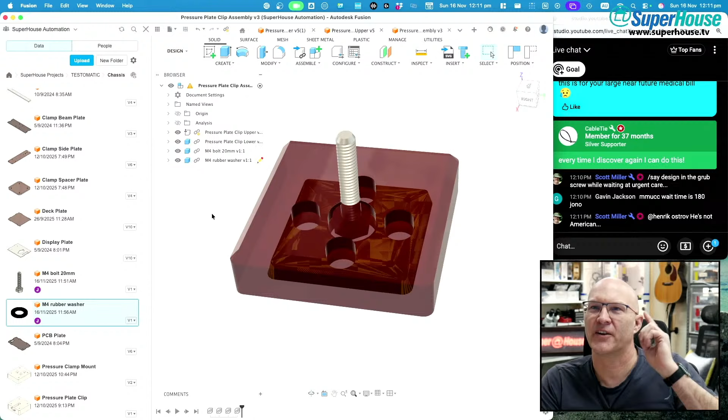So what I should do, in order to do that, okay, here is the sucky thing. Because of Fusion's cloud dependency - well actually it's the good thing, I don't have to copy files over - but what I need to do is save all of this. Well, I'll just close all of these things. I need to open Fusion on my laptop and tell it to cache all of these files, and then they will be there when I'm offline.

So, yeah, who knows what's happening in his foot. Yeah. MMUCC wait time is 180, Jono. Okay, MMUCC.

So, oh, they don't bulk bill. Cool. Thank you, Johnny. All right.

Actually, that's a good argument for going to my GP clinic tomorrow, because they will bulk bill me. They generally do bulk bill me, so yeah, I think I'll do that. It was 5 o'clock last night, so if I go first thing tomorrow it'll be well within the 48 hours. I reckon I'll be okay. I don't think I'll die in the meantime.